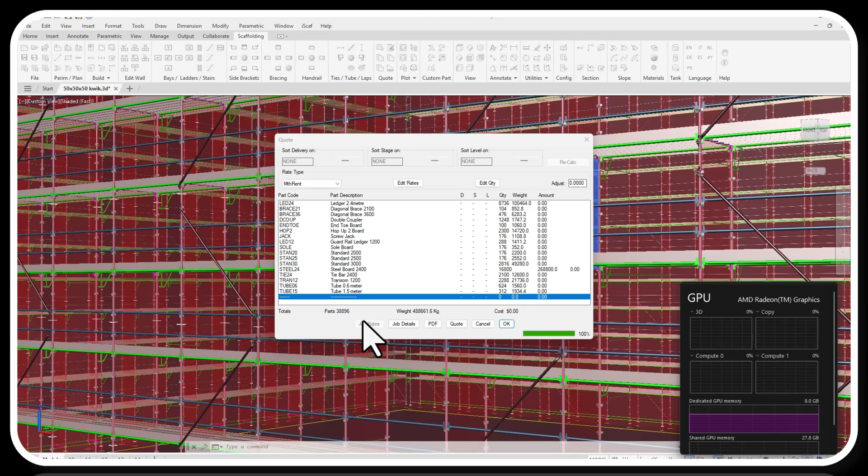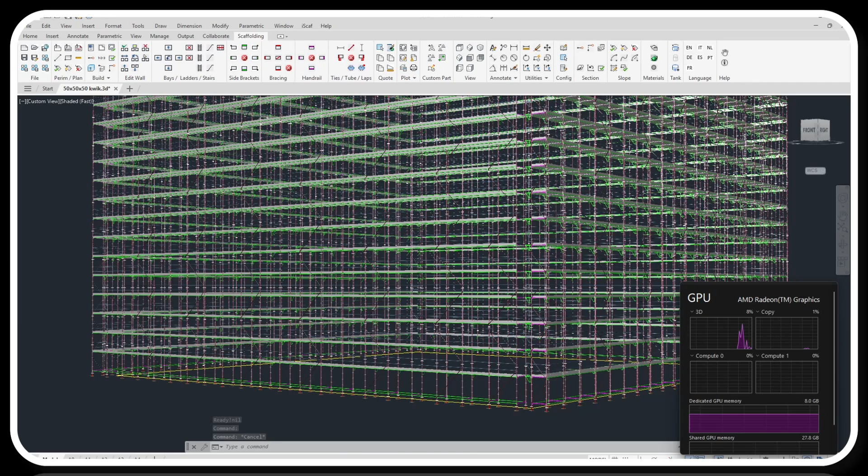So we've got a massive drawing here, 50 meters by 50 meters by 50 meters high, of Kwikstage that has nearly 40,000 3D parts in it. I'm just using this very low included CPU at the moment, so zoom's quite slow, takes about a second or two to zoom in and out on. But once we reach our zoom position, in shaded fast mode here, rotation is actually quite quick, and we're getting probably around about maybe 15 to 20 frames on such a massive drawing.

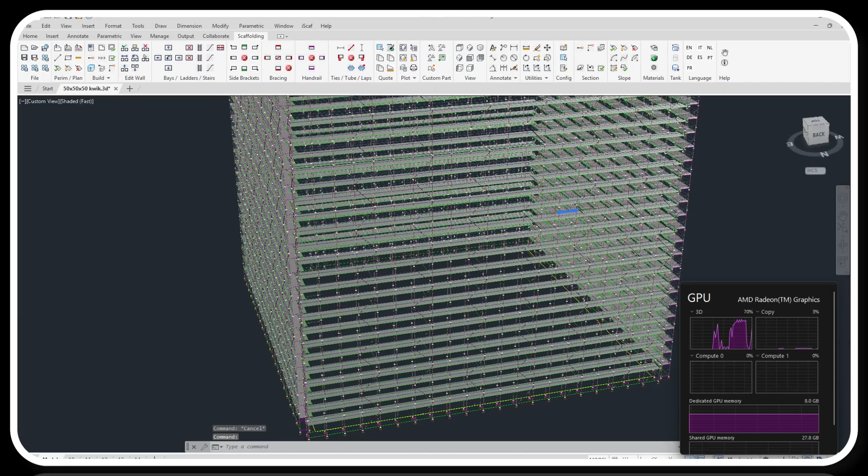It's pretty large improvement in performance, and when we release it takes a little while to recover. You can see down here that the AMD graphics built into the CPU is being utilized in performing these 3D feats. I'm going to keep this drawing loaded, and I'm going to turn off the graphics performance options.

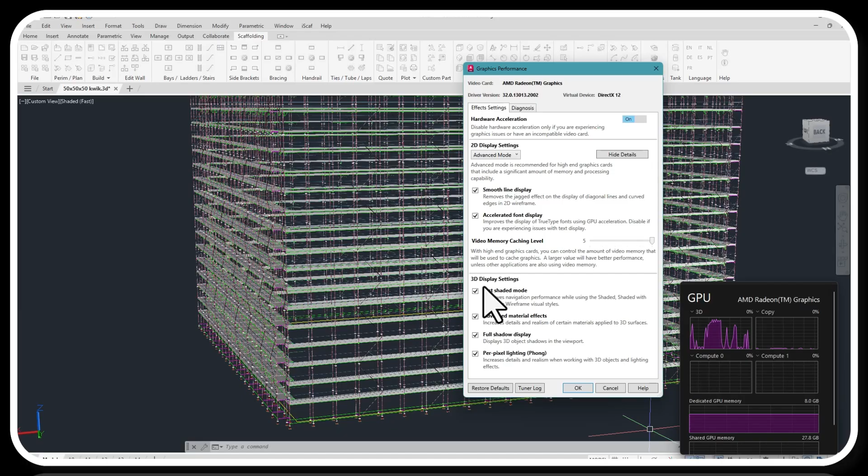Okay, so you can see this fast shaded mode currently enabled. I'm going to turn off all hardware acceleration, so it's not going to be using the GPU, it's just going to be using the CPU. And it's going to recompute. Now it's going to take some time to recompute because it's not got the GPU to help it compute all the vertices of 40,000 pieces of equipment.

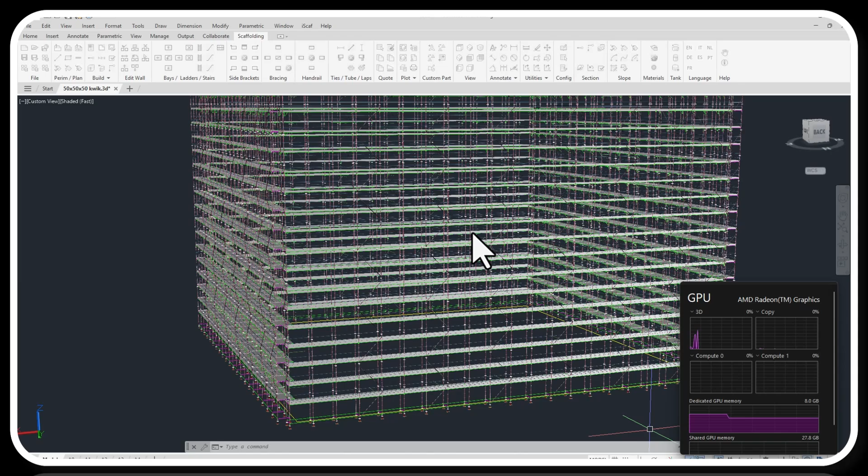And you'll see this fast mode for shaded disappear once it's managed to refresh. So the CPU is quite fast, but there's a limitation that even though the CPU has 16 cores, it's only using one of those to compute the majority of the information.

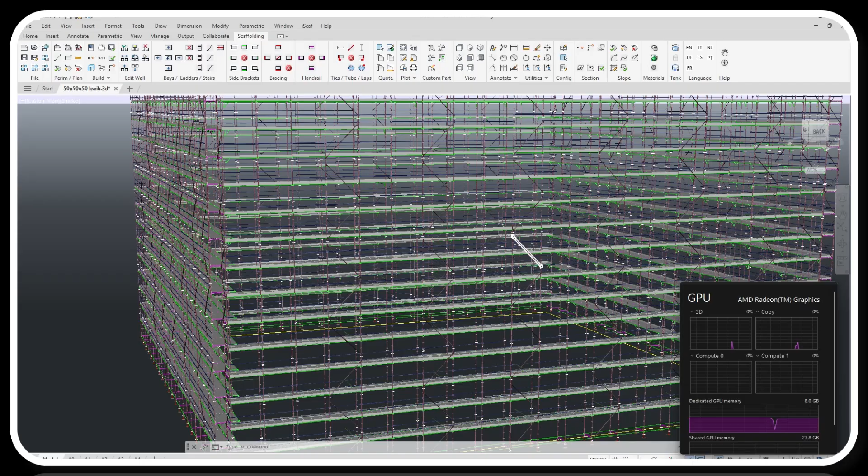Okay, so you can see now we've got shaded mode fast no longer selected, so I'm going to zoom in, and the time to zoom in takes around about the same amount of time. And now I'm going to do an orbit, and you'll see the difference is that it is unable to keep up, so it's just doing a minimal refresh.

I'm letting go of my button, I've stopped scrolling, but because the system has rotation cached, it's going to continue on. So this can take like 30 seconds for the system to finish what it's doing and get to the location that it's getting to, which is not really ideal. And you can see in this 3D mode, there's no 3D compute going on with the inbuilt AMD graphics.

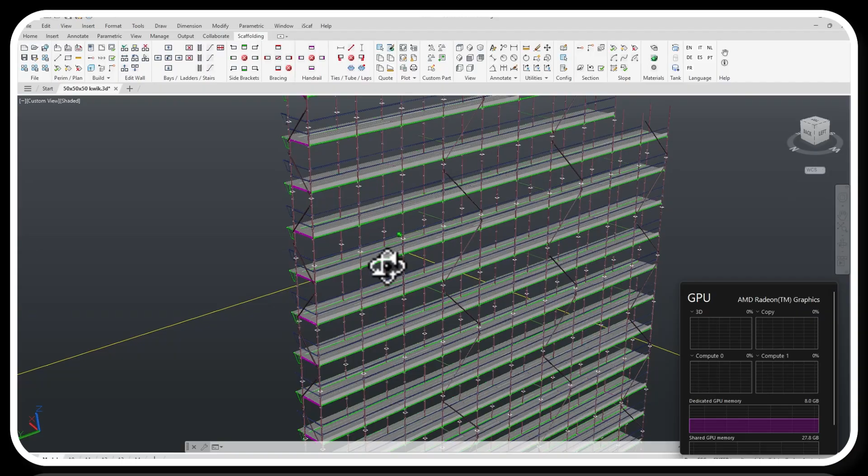So you can see it's substantially slower, and 2D wireframe is similar sort of speed. So once again, this drawing does have 40,000 highly detailed 3D elements in it, so it is a very, very large drawing, just to demonstrate the differences that you can expect from iScaf 11 fast mode if you have

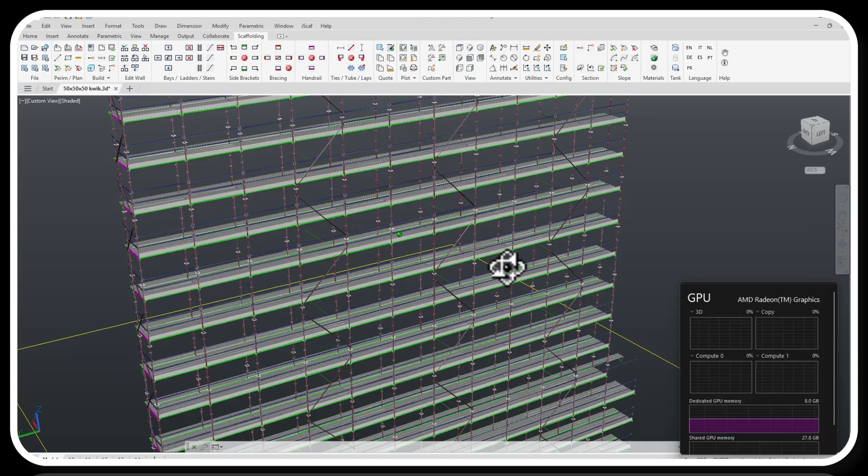supported 3D graphics. And it appears that the Intel Arc cards are not currently supported for acceleration in this mode, but the current crop of, or for the last few generations of, AMD and NVIDIA GPUs, even the gaming ones, are supported.

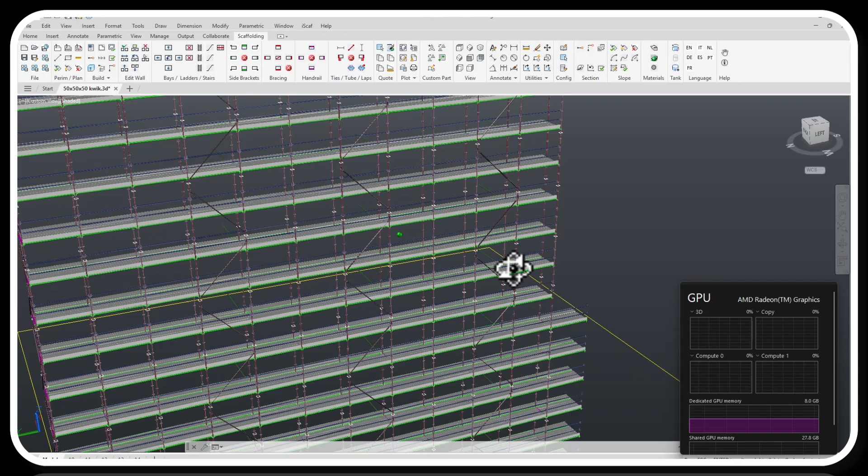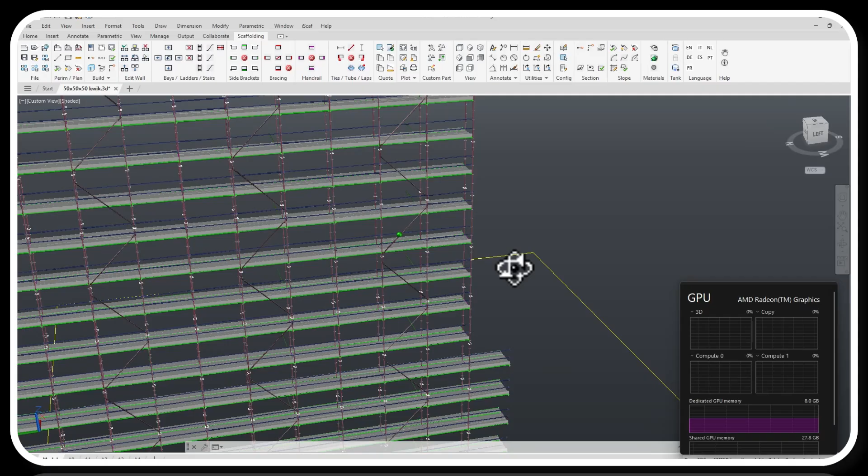So this is all running on a desktop machine rather than a laptop. The NVIDIA cards in particular, they have the same graphics card names for their laptop version and their desktop version, but even though they have the same name, an RTX 4080 for instance on a laptop performs about the same as a 4060 Ti on a desktop, even though the names are exactly the same. Or if you have a 4080 desktop compared to a 4080 laptop, the 4080 desktop will run about 3 times faster.

It's still catching up to where this display is going to be, so you can see that this mode is changed. Once this finishes and restores, I'm going to change my graphics card over for a desktop 4080 Super, which is quite a high-end card. Cost me about $1,500 6 months ago. You can't get them anymore.

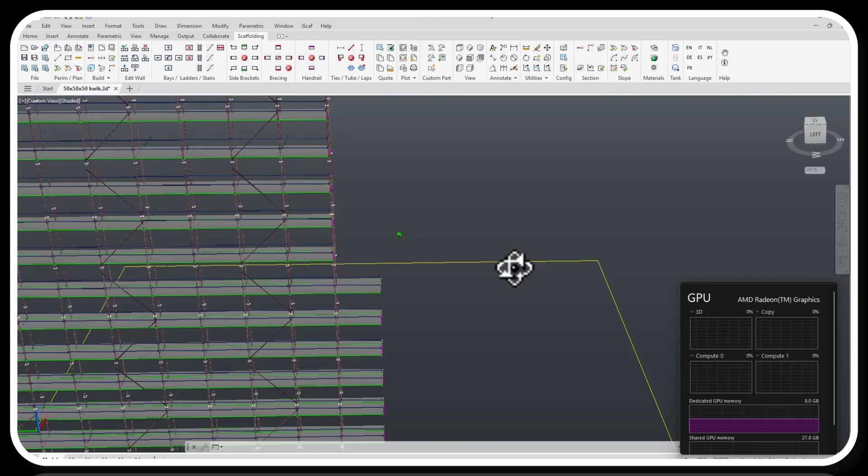The 5000 series has gotten much more expensive, so you might be able to find something on a second-hand market that might help you out. But you can get quite good results with relatively low-end hardware. So have a look at the recommended devices on our website to make sure that you have hardware that can fully take advantage of this. But even if you do have just inbuilt graphics on your CPU, you will still see a substantial improvement in performance in 3D fast modes, which is the wireframe fast and the shaded fast modes.

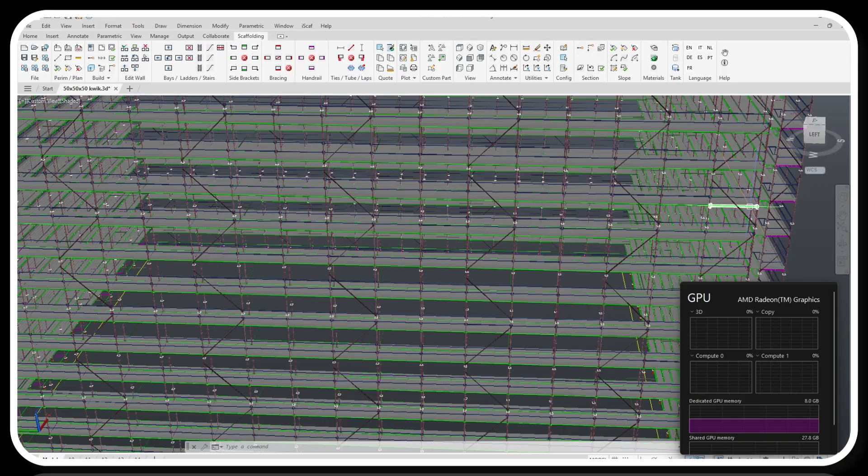So you can see we've just finished there. Okay, I'm just going to break here and I'll come back and load in the 4080 Super so you can see how fast that is in comparison.

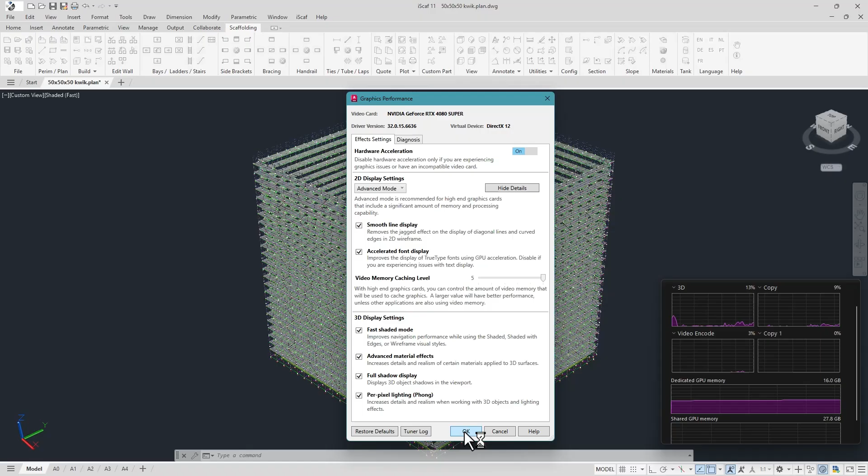Okay, so I've loaded the same drawing back in. This time the graphics card that is connected is RTX 4080 Super NVIDIA card on a desktop, which is not the same as a 4080 laptop, just to be clear. So the zoom, just zooming in, is around about the same sort of performance.

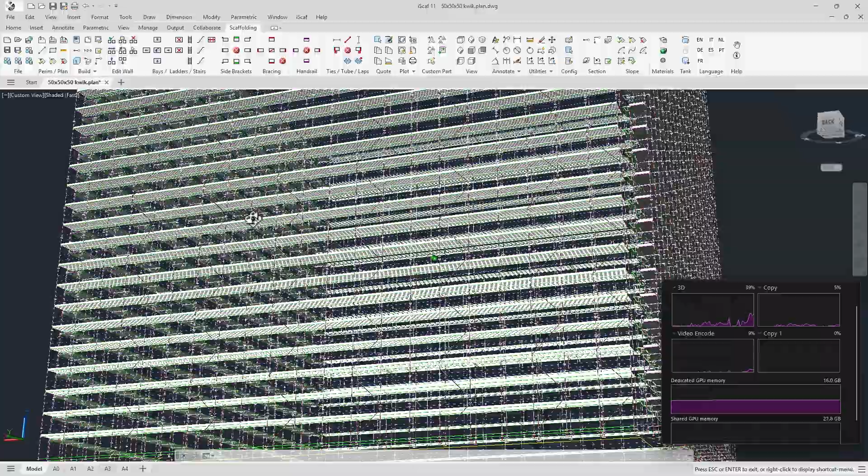But when you finish doing your zoom level, if you start your orbit command, you can see that the performance of this card, you can't kind of get it to slow down. It's very, very fast. So I'll zoom in again. Change my perspective. Slight pause. Pans immediate. Every time you stop, and slight pause.

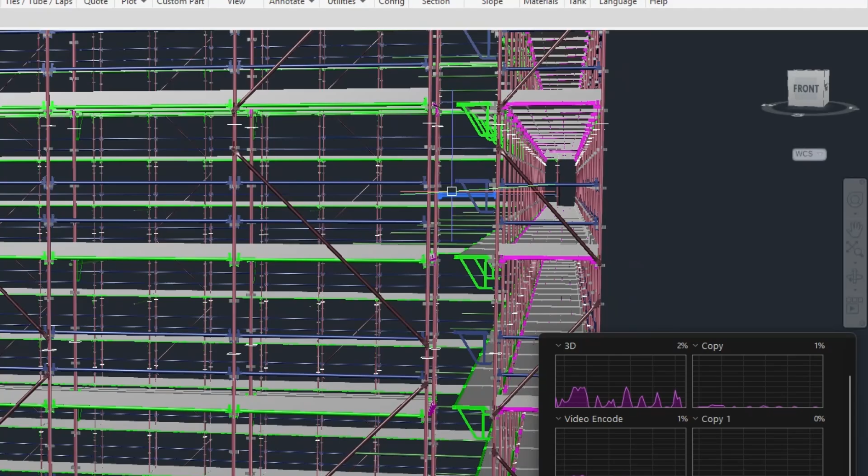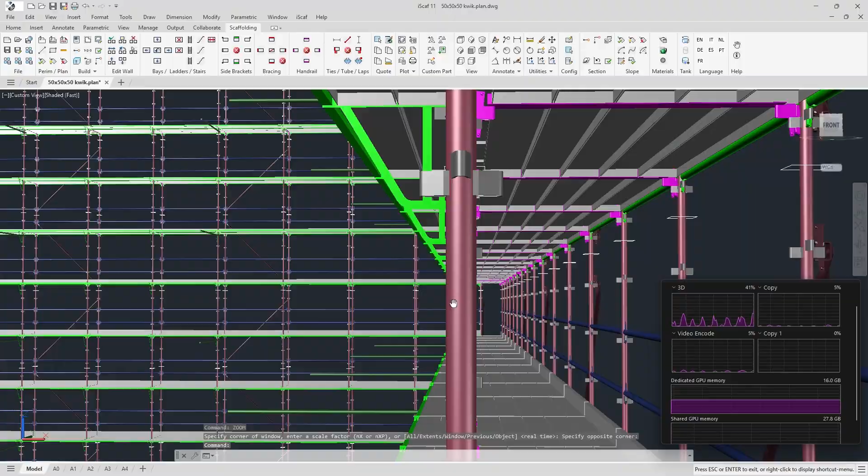I'm just going to zoom in on a window, and from this direction, we'll orbit. You can see there is substantial improvement in the speed for iScaf 11 using an advanced GPU.

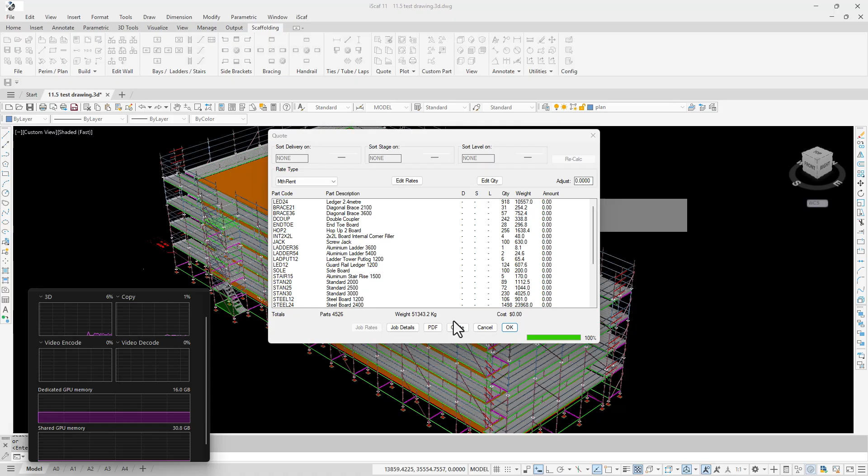So I have a different drawing here, more typical of standard small residential to medium commercial type drawings. It's got 4,500 parts and 51 tonne. It's got the same module, with a few extra features. We are using the GeForce 4080 Super again to have a look at this.

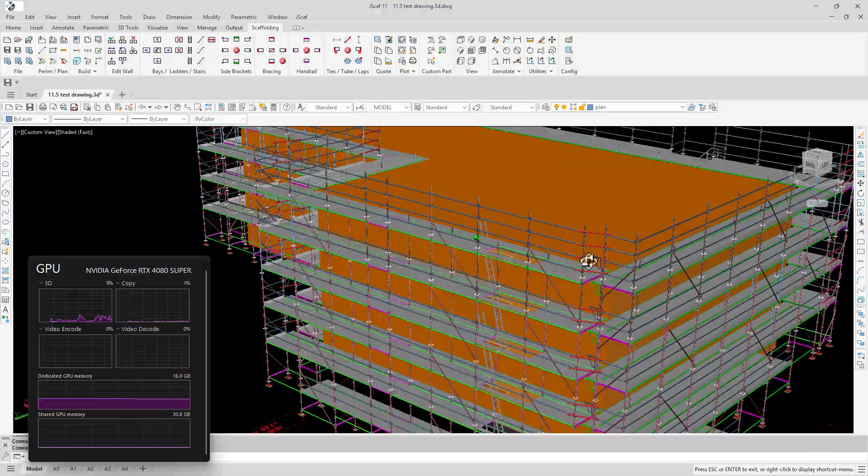So this is a desktop version, and this one has a little bit of sloping ground and that sort of stuff in it as well. You can see other features, and you can see that this performance on the 4080 is unchanged. It's very, very rapid, probably managing anywhere in the order of about 120 frames a second, and it's not even really taxing the GPU. So I'll come back and show you what the onboard AMD software does with it.

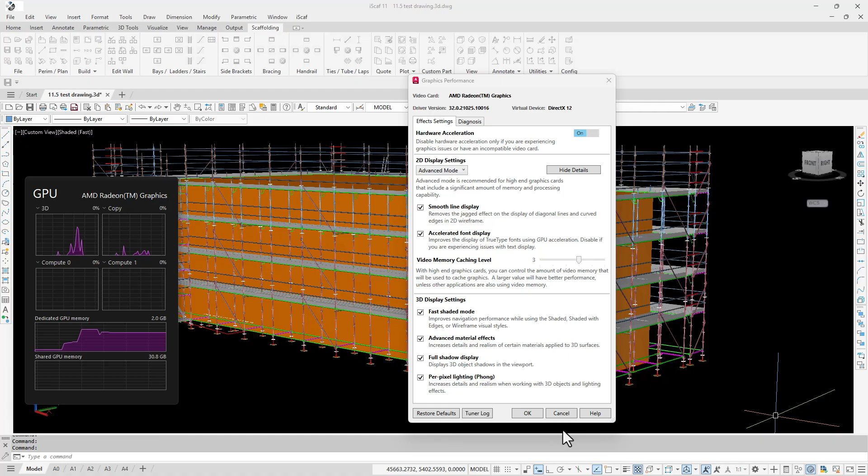Okay, so we've got the Radeon Graphics in use now, and we've loaded in the same drawing. You can see the fast shaded mode is enabled, and the performance with this drawing is not quite as rapid, probably getting about 30-40 frames a second. So onboard AMD graphics with modern AMD Ryzen 7 9000 series, 7000, 9000 series are actually working quite well.

We'll try the Intel Arc graphics next, because that has been having some issues. One moment.

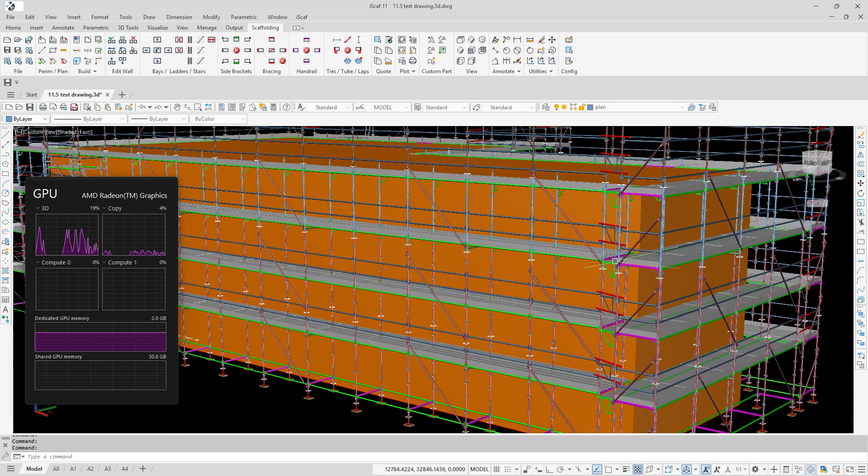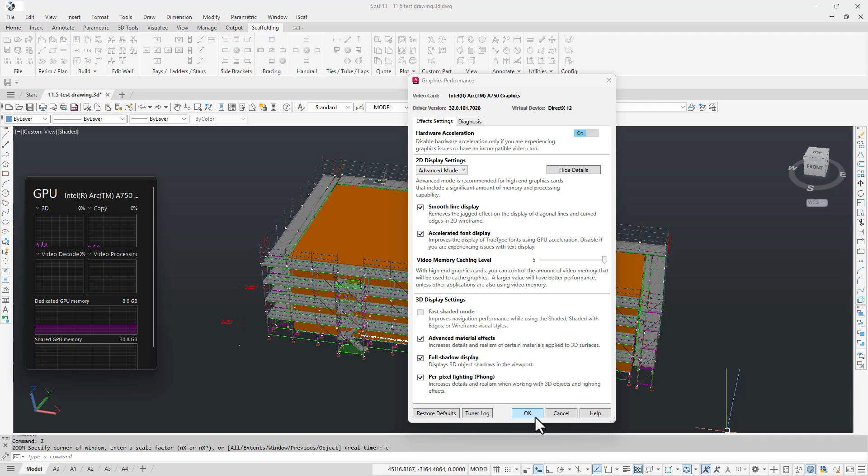Okay, so this is the Intel Arc A750 graphics. It's a separate graphics card, not onboard graphics, but we found lately, for the last several versions, the DirectX 12 support of the Intel onboard graphics and Intel Arc graphics has not been passing the FP64 mode, so fast shaded cannot be enabled on these cards. So their performance, therefore, is going back to normal type behavior.

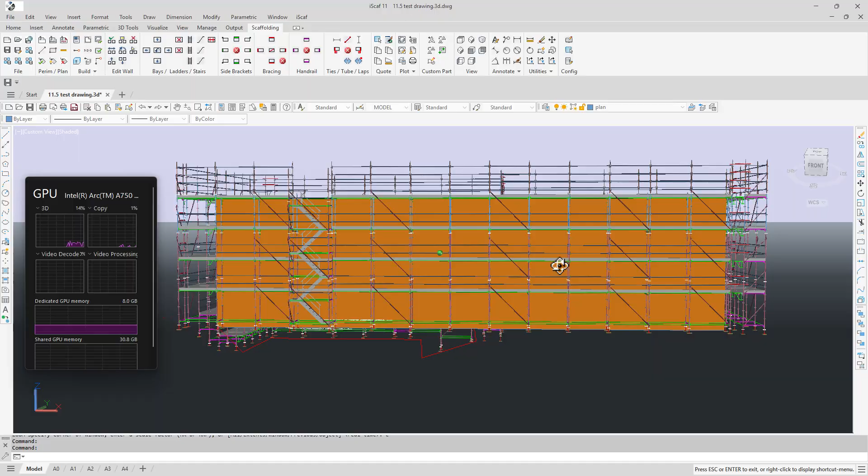So it will still use some acceleration, but these fast modes, which you'll see in the orbit, are quite a lot slower. Now it is managing on this smaller drawing to work reasonably well and use some of the GPU, you can see on the side, but it's producing probably around about 20 frames on this smaller one. But I'll reload that 50-50-50 on the Arc, and you'll see that it's substantially slower.

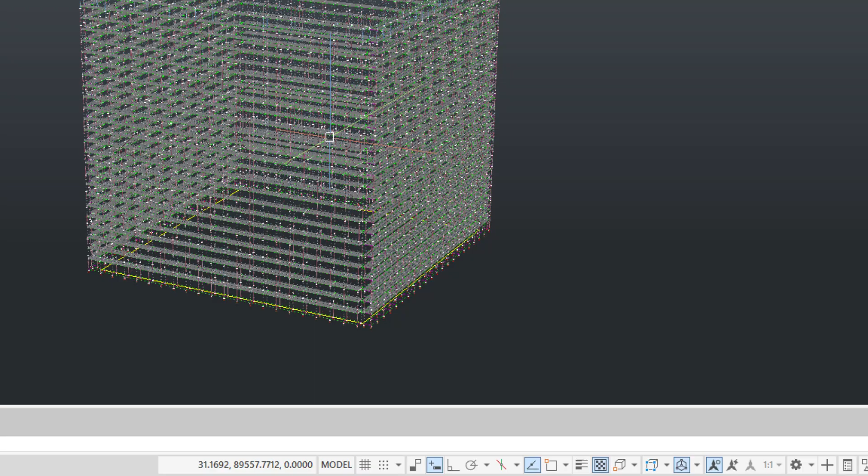Okay, so we're using the Intel Arc to render this in iScaf 11. This drawing has 500 tonne and 40,000 parts, and you'll see that the orbit using the Intel Arc degrades and can take quite a long time to repaint. I've let go of the mouse button and it's catching up, not quite as slow as one of the other ones. Zooming with this many objects is also quite a lot slower.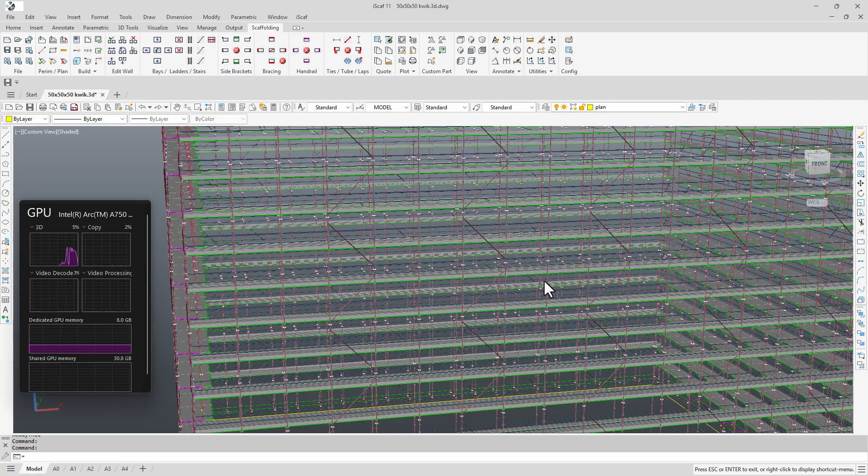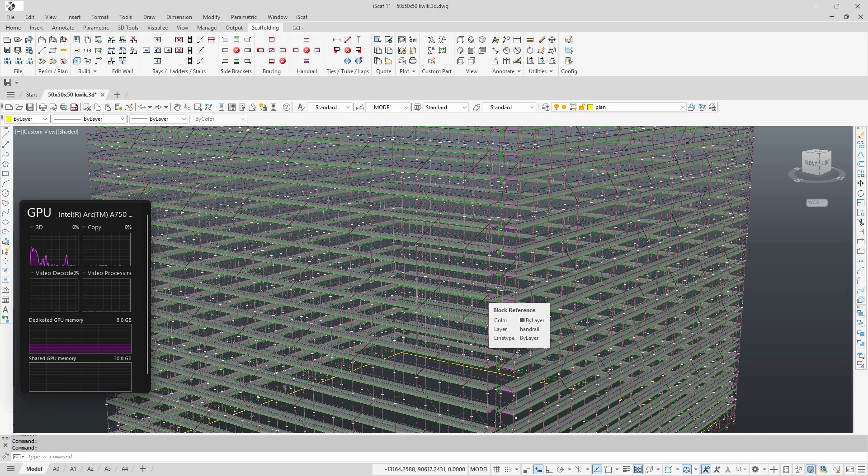The 4080 desktop is very good at performing the calculations required to recompute the vertices, which is what's going on here. But as for actual 3D acceleration of this mode, the Intel Arc and the onboard Intel graphics, apart from some very recent ones that have not been enough for us to be confident going forward, that's where it's going to remain. Just be aware that this 3D acceleration for onboard Intel graphics and Intel Arc is probably not going to work. Intel Arc B series might be a different story, the Battlemage, but as I said, we haven't been able to secure access to enough of them to be sure that we can confidently say they're okay.

All right, I'll go and do some desktop laptop versions of the same thing now, and we'll be back shortly.

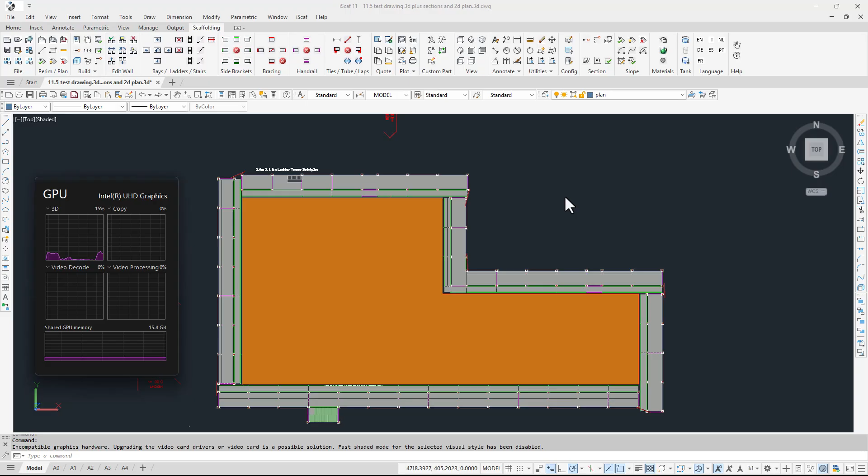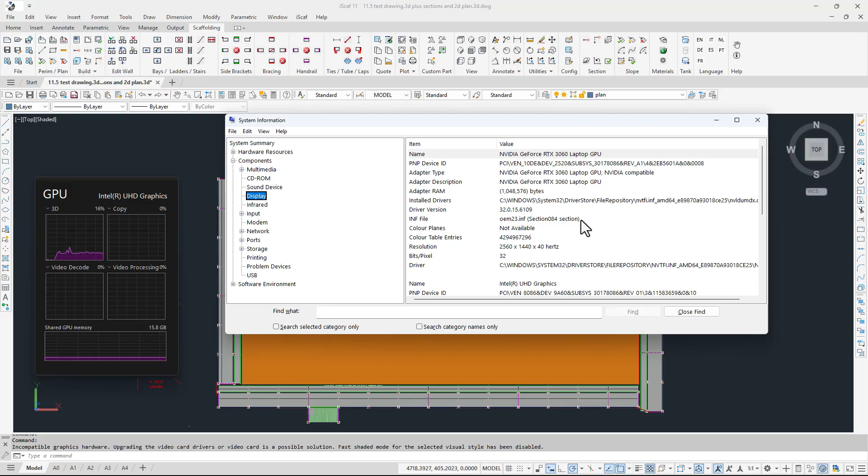So I am on a laptop now. This is an Intel laptop, part of the Intel NUC series. It is an 11th gen 11800H with 16 cores, and has an embedded display device as well as an RTX 3060. So it has the Intel onboard graphics, which is common to a lot of recent Intel displays, as well as having an RTX 3060 laptop GPU. Bearing in mind that the laptop GPUs have substantially less power than their desktop counterparts, even though they have the same name. Okay, so we've just got the Intel UHD graphics on here at the moment, engaged with iScaf.

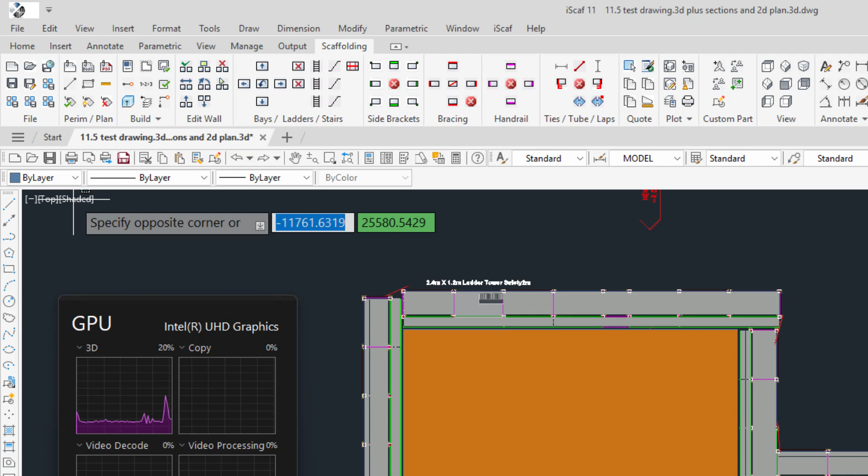You can see the fast shaded mode again is being disabled, same as the Intel Arc. So the onboard Intel UHD also has the same problem, no little faded fast suffix on the shaded option there. And when we do our orbit, you can see that it's substantially slower again, all the elements here are quite a lot slower.

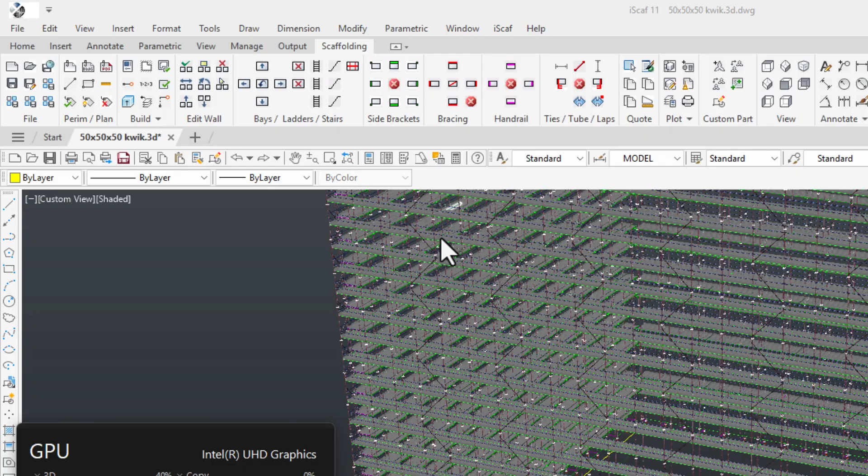Okay, and I'll show you the 50-50-50 as well. Just one moment. Okay, so we are back with our Intel onboard mobile laptop graphics with a 50-50-50 drawing, 50 meters square and 50 meters high.

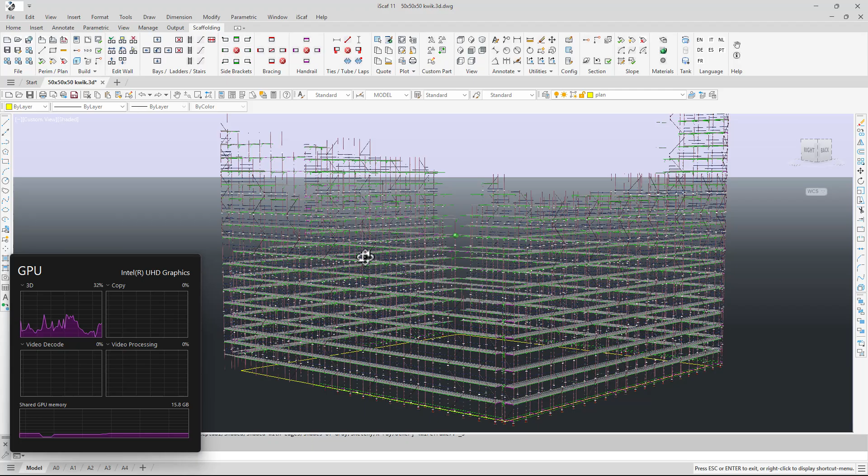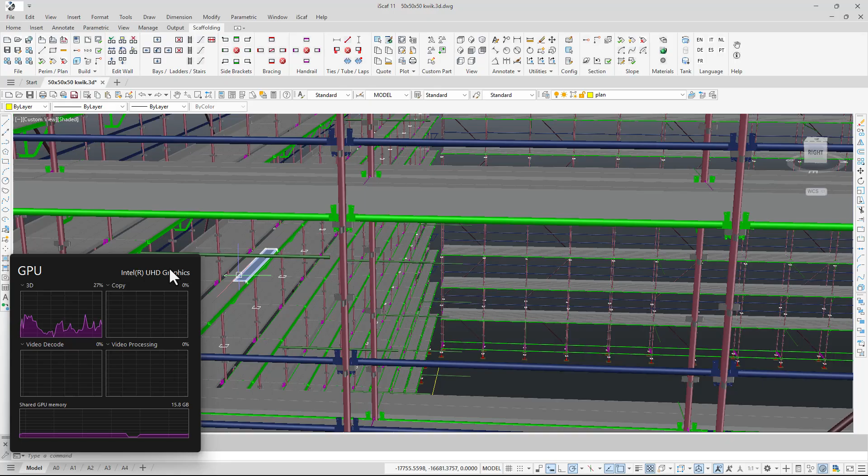And we'll go in and start rotating this one. You'll see that the Intel UHD onboard graphics is still doing a passable job, to be perfectly honest, with something this size. It's a high-performing CPU as well. It takes a little while to recover from doing, but there's no fast shading mode involved with this. It's still not performing terribly bad, just compared to the accelerated 3Ds, they are not as good. So let's change to the onboard RTX 3060 laptop and show you what these look like in that.

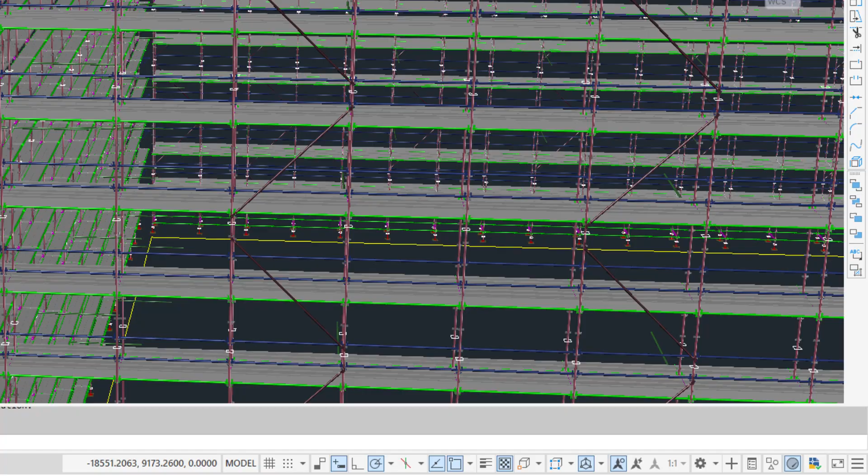Okay, so we've engaged the NVIDIA RTX 3060 laptop GPU now, which has fast shaded mode support. You can see that the GPU here is just getting its performance, so we'll just turn it. So zooming with this number of vertices, just like in the other, is a bit slower, but the rotation is quite good. You can see this is nearly as good as the 4080, although we're saturating the GPU a lot more doing these drawings.

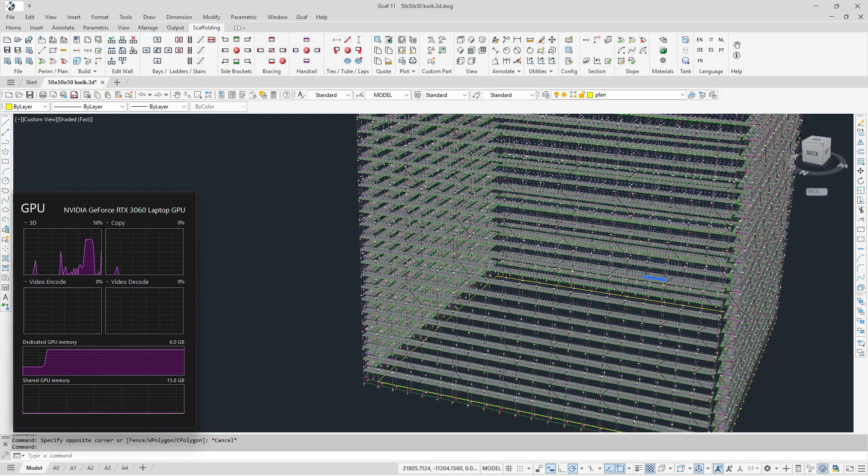Let go, it has to recompute and regen. So just zoom in, you can see that the zoom in is probably more to do with the CPU and somewhat to the GPU. I'll stop doing that, and then you can see that its performance here is quite good as well in 3D.

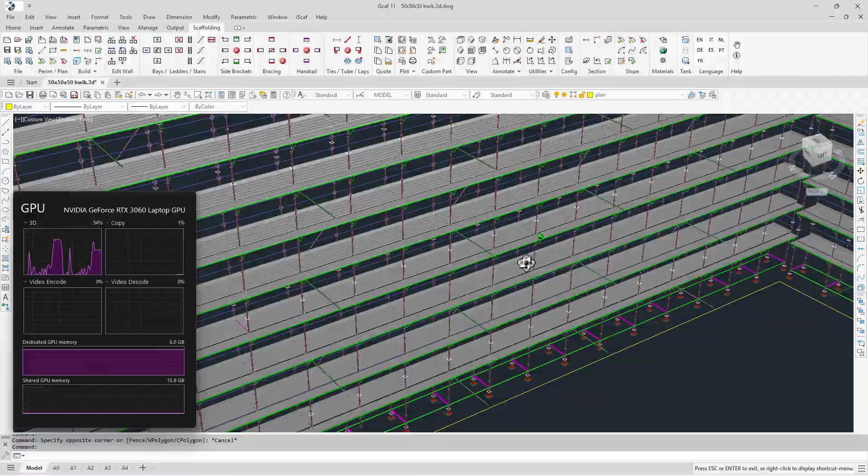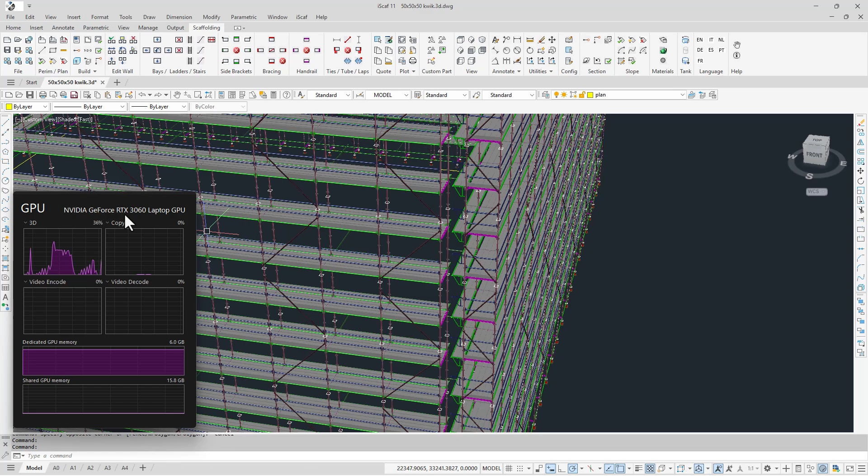So this is not by any means a high performing laptop GPU. It's on the lower tier, not quite the lowest, but you can get quite good performance out of moderate, like 2060s, in the laptop space as well. Also, bear in mind that the 3060 desktop GPUs are roughly about 50 to 80% faster than the laptop ones that have exactly the same name. It's a bit of a bugbear of mine, a bit of stupid naming, but anyway.

Okay, and I think we've got one last round of tests to show you.

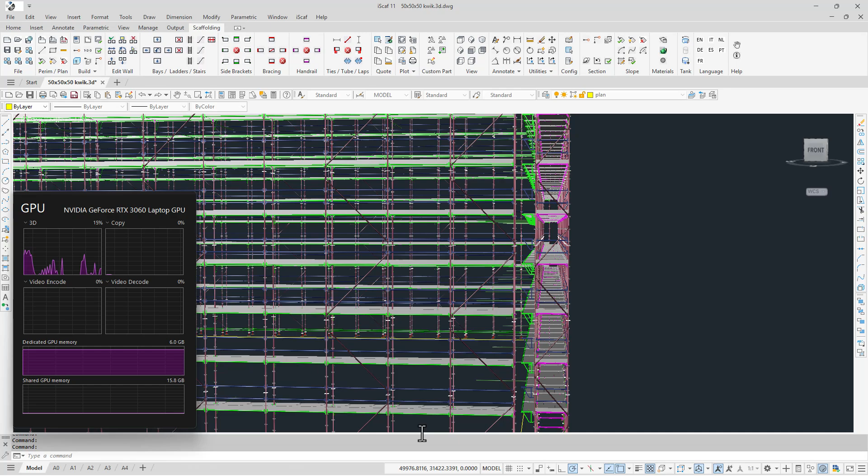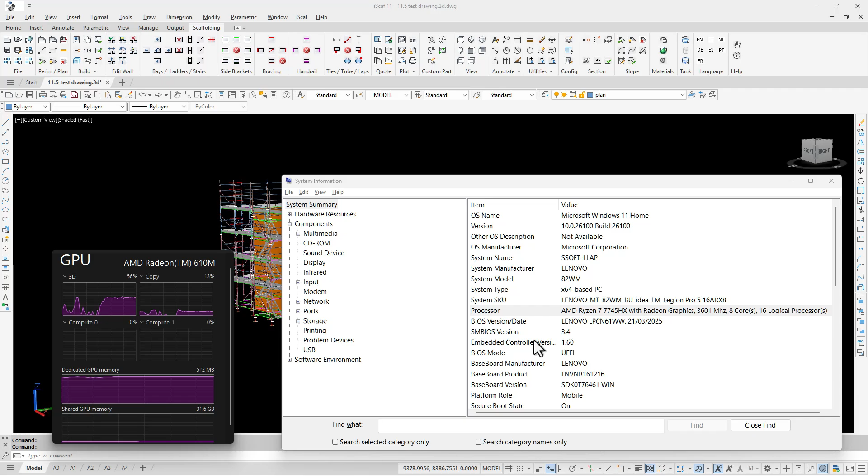So I'm running on a relatively recent laptop, a couple of years old now in 2025. It's a Ryzen 7 7745HX with inbuilt Radeon graphics, AMD 610M, Radeon 610Ms. So it's their more basic version of the graphics that they usually bundle with their CPUs, inbuilt with them. This particular laptop also has an NVIDIA RTX 4060, so it's kind of on the same tier as the 3060, a little bit faster, a little later. Mind you, the 5060 is not as good performance-wise, generation on generation. Just a bit of extra information there.

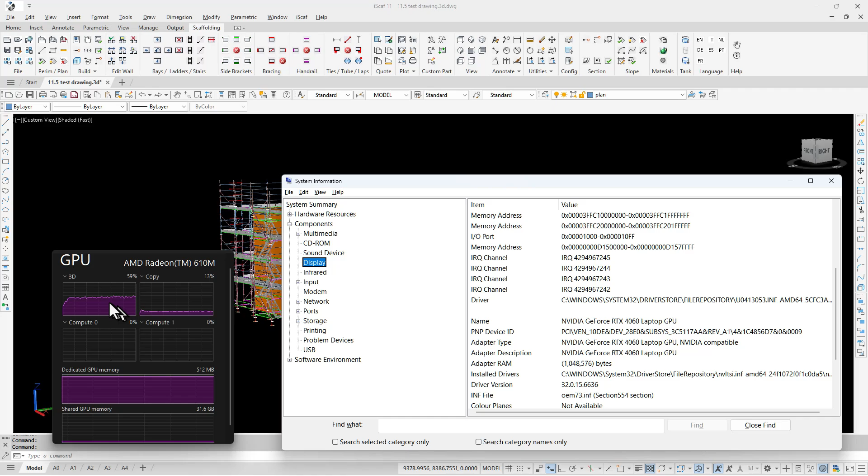So you can see it's doing some 3D work in the background. It's probably because I'm doing the recording. It's using that to do it.

Okay, so this is our standard test drawing. As you can see, the response here is quite good, getting about 60 frames, maybe even more on this drawing. Zoom for this smaller drawing is quite good. You can see the performance using the inbuilt AMD is quite good.

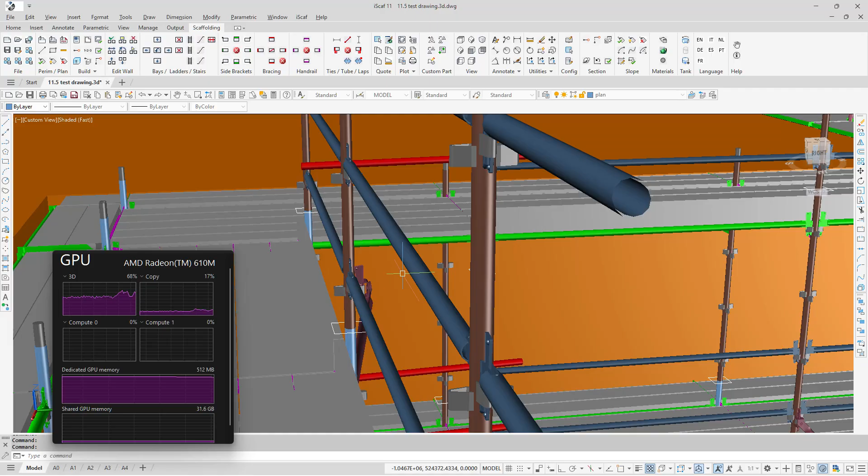It's very busy - sorry, it's very windy here today. Very busy.

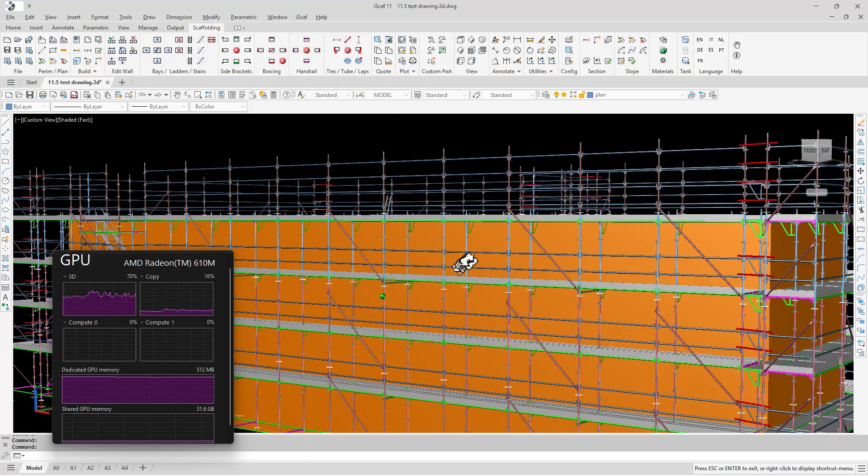The CPUs that are more recently being released by AMD are beginning to integrate some quite advanced graphics, which you should see quite substantial improvements on, that use the RDNA GPU structure built into the CPU, and they should be well capable of doing some extremely good performance without breaking the bank.

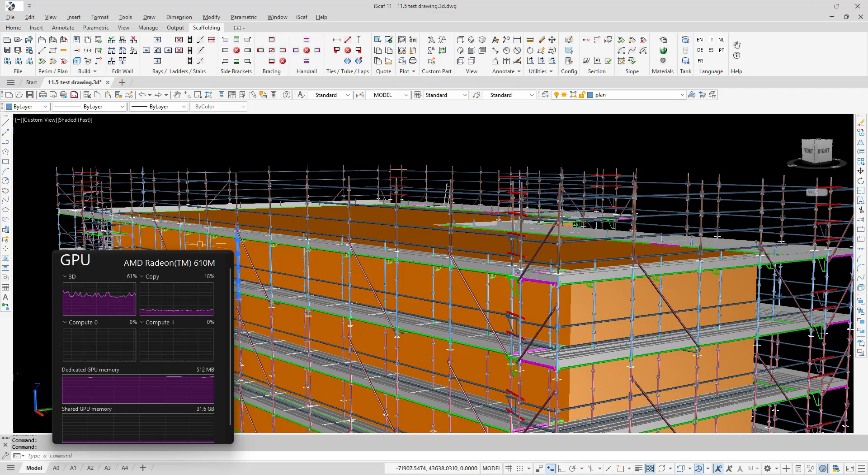All right, I'll swap over to the 610M. Back in a moment.

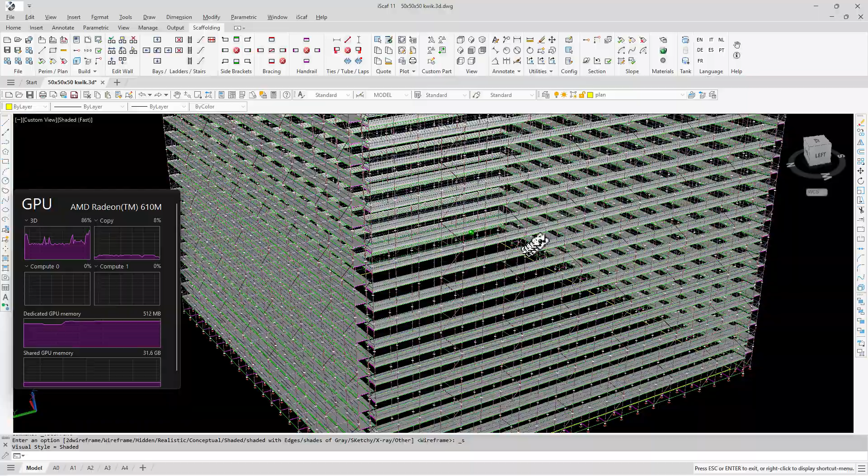Okay, so we've loaded the 500 tonne model in, and let's see how we perform here. So this is in fast shaded mode using the inbuilt AMD Radeon 610M. As I said, there's new AMD Radeon laptop CPUs coming out with RDNA graphics enabled in them, and they're substantially faster than this.

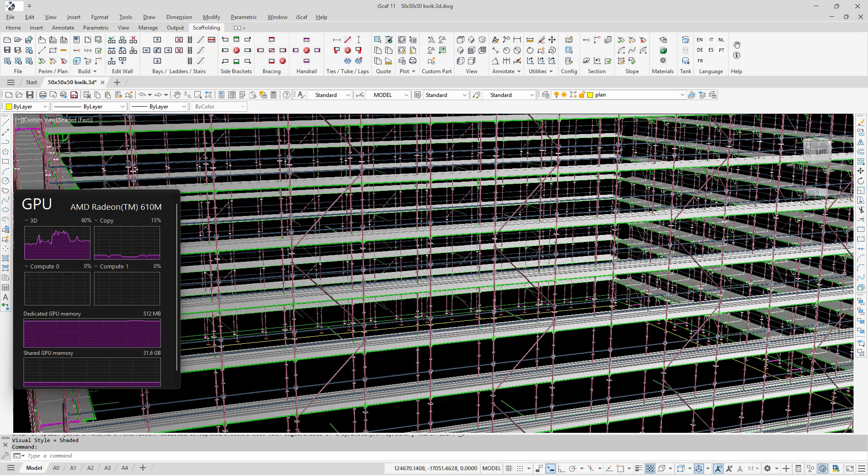Without requiring maybe an external graphics card, we're just getting some delays in compute to zoom in and out on such a large model, but we'll see if that improves when we engage the external graphics card. Okay, I'll come back with that in a sec.

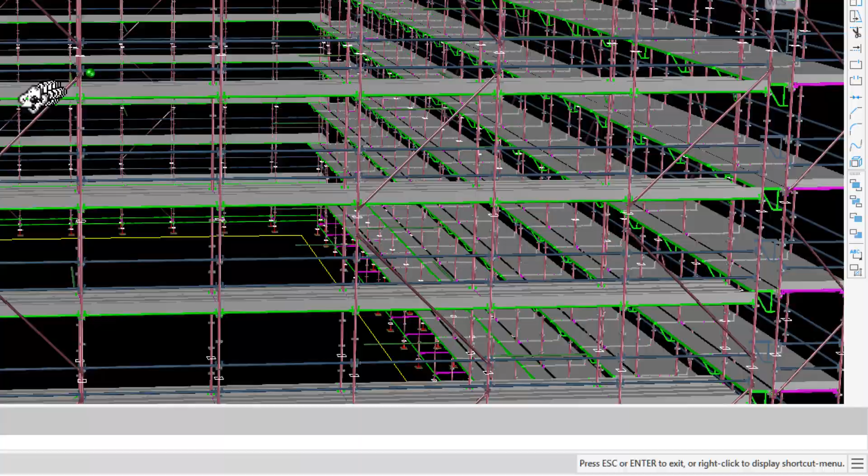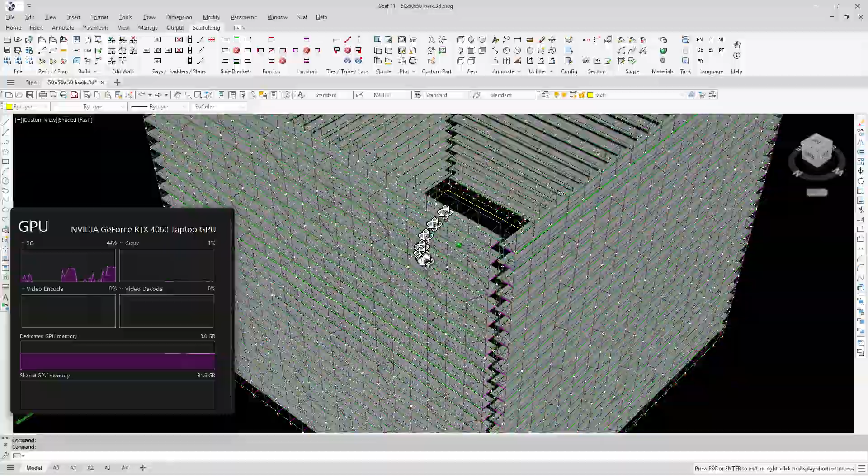Okay, so I'm back now with the NVIDIA GeForce 4060 laptop GPU, which has 8 gig of video RAM. You can see fast shaded mode is enabled here. So this is on our big drawing with 500 tonne. You can see that the performance in this drawing from a movement perspective is quite high. Again, as mentioned earlier, there's a lot of CPU usage in changing zoom, configuring all the vertices, of which there's well over 8 million for every view change in this drawing, to zoom in and out. But again, I can't get the GPU to be saturated on this for performance with such a complex drawing.

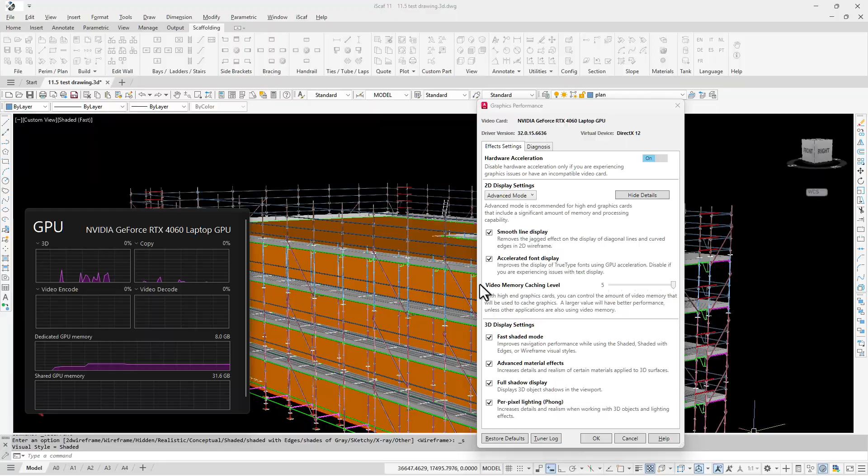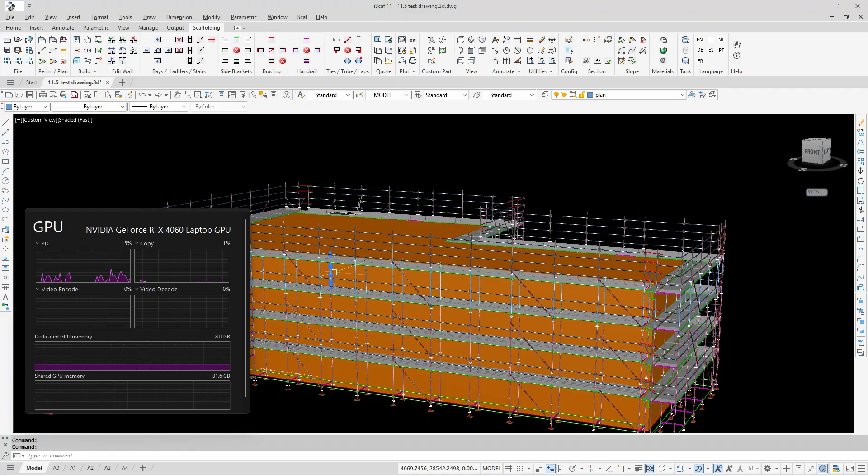And lastly, we'll just show you the 4060 with the smaller medium commercial. So using the RTX 4060 laptop with 8 gig of video RAM with the medium level drawing, as you can see, we can't get this one to slow down. Its performance is quite good. It's able to zoom in and out a bit faster just because the sheer number of elements in the drawing is less. You can use isolate objects to limit the amount of objects being drawn in iScaf for larger drawings so that you get better performance. That's sort of advanced, and there's some other advanced shading modes here.